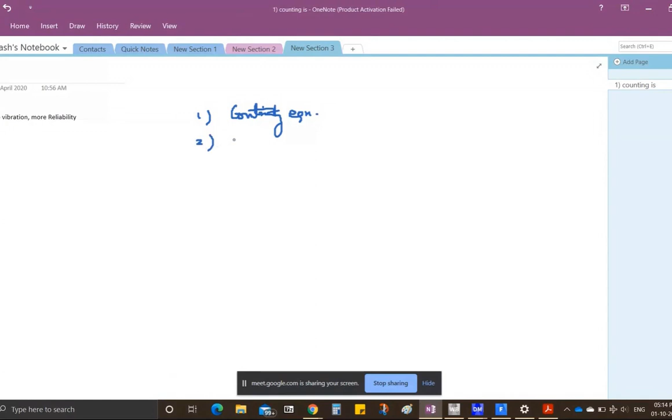First thing that we discussed was the continuity equation, in different forms. We were trying to understand the momentum equations. So momentum equations, if they include viscosity as an aspect, it is called the Navier-Stokes equations.

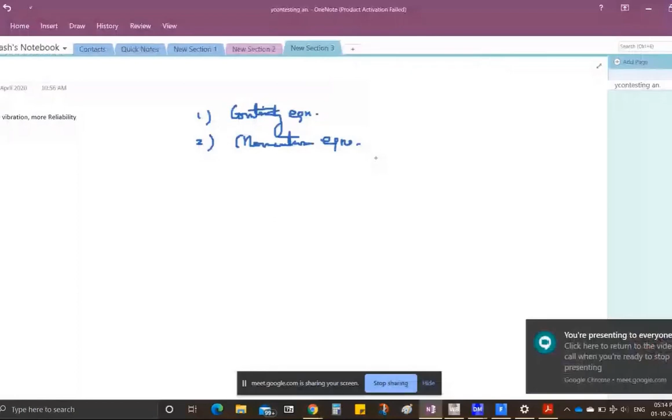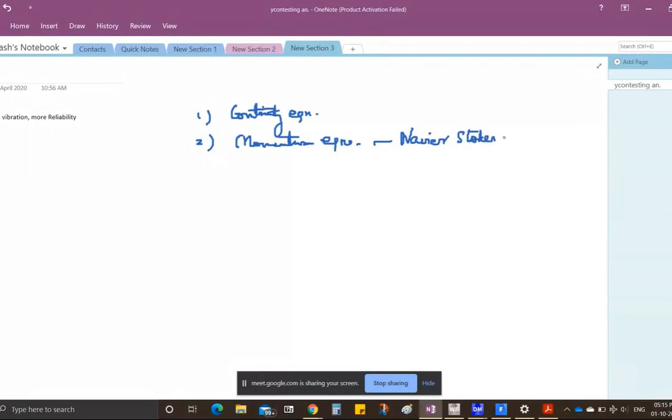So momentum equations, this is what we are trying to understand: the conservation of momentum. This is called the Navier-Stokes equation. So if it is involving viscosity as a parameter, if viscosity is included as a parameter, this is called the Navier-Stokes equation.

In some cases, you may think viscosity is not an important parameter, so we can drop the viscosity term from the equation. In such cases, the momentum equation is called the Euler equation, since viscosity is negligible. So these are the two ways in which momentum can be written.

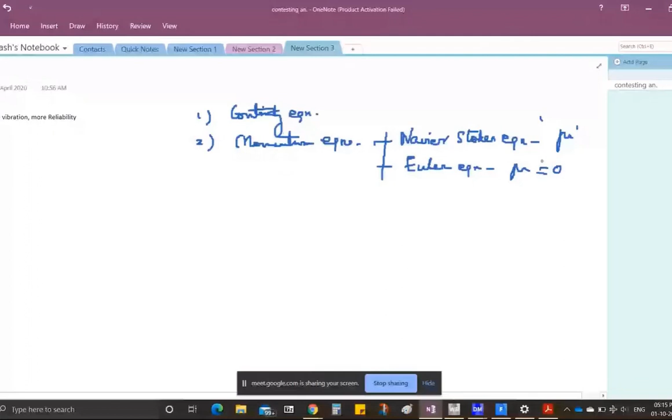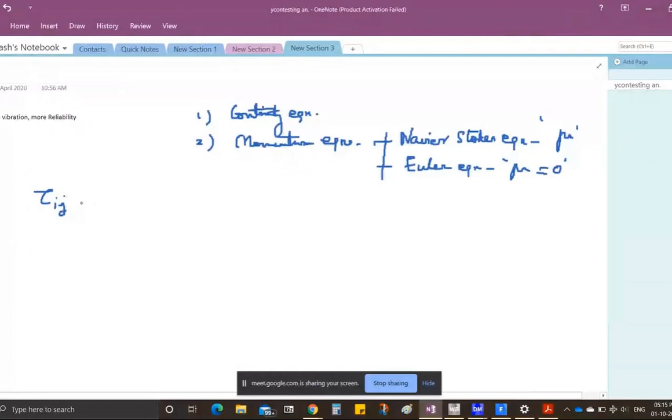I was trying to give you the notation in which you can represent stress, and from stress you could calculate the forces acting, based on the equation stress into area, on which it was acting. We were trying to understand this in the perspective of a fluid element which was in motion.

This fluid element is subjected to motion because of the force, which can act in different coordinate axes.

I told you that, for example, we can take the control mass approach if you want. Control mass and control volume approach both can be taken for finding the governing equations. So we are trying to understand this in the perspective of the control mass approach.

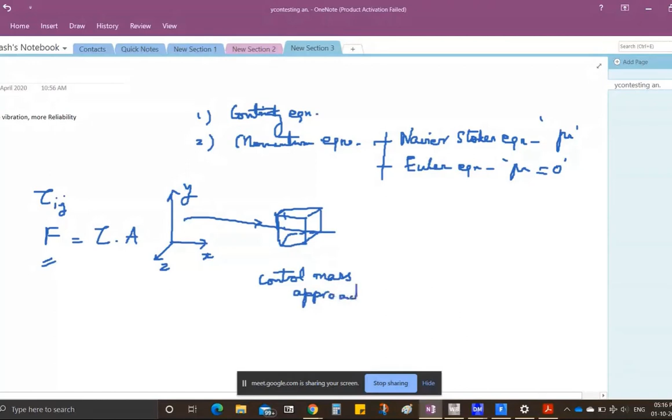Here we could understand these forces can be of different types. This is mainly about surface forces we are talking about. The surface forces can be shear force or normal force. Then another category of forces is the body force, of type gravity, and another type is field forces like magnetic field force. Such forces can happen.

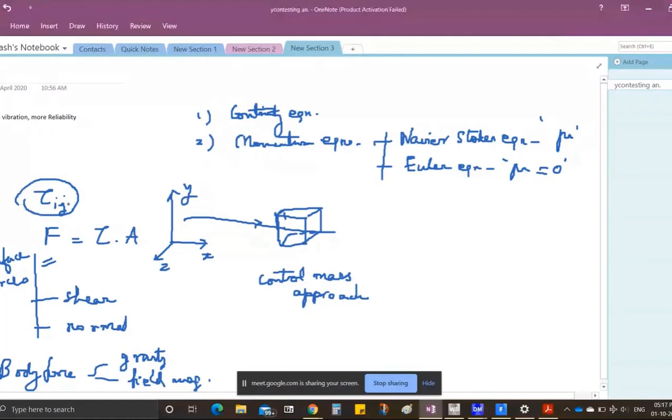In this notation where we represent the shear stress, I was telling you it represents initially that the stress is acting in the direction J, and this stress is acting in a plane that is perpendicular to I. This is how the notation is written. So with that we understood we could represent the stresses.

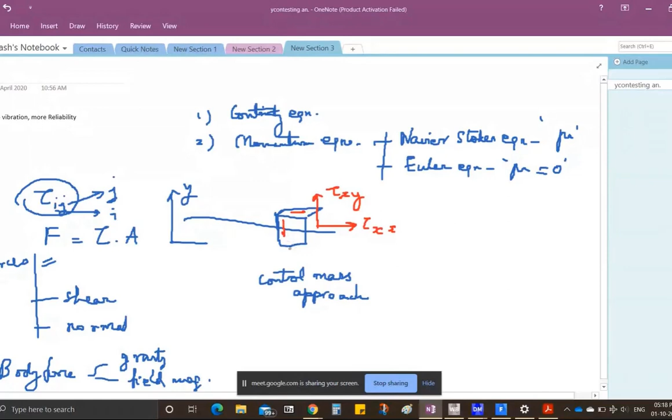We could represent the stresses like normal stress with this notation. Similarly, we could represent shear stress with this notation. Similarly, you can imagine the stresses in all the different faces in which it could act. I was giving just a simple example for it.

So now with this stress being calculated, and knowing the area on which it is acting, because this area is available to you, you could easily find the forces on each of the faces that is acting. Let me draw one single figure which will represent all of this before writing the final equation. I will not derive the equation because it will take some time. You can refer to any textbook to get it, but I'll give you a hint on how this has been framed so that when you look at standard textbooks, you will not be confused how this was obtained.

I want to go to this final equation because it gives a lot of insight on what we learn later. Otherwise we will never know why the equation is written in that way. In order to explain that, I would need a detail of a fluid element, which is under various forces on its axes, on its faces.

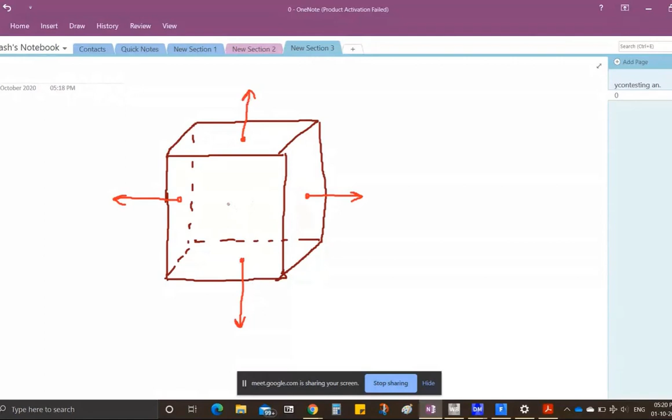Let me just write the various forces here: normal force here, similarly the normal force here, the normal force on the other face, similarly the normal face force in this direction on the other face. Similarly, the shear stresses I could draw with another color. So this is the starting point, I would represent that with some arrow mark.

Okay, so similarly you can imagine this face also having such forces. So I just wanted to write how the expansion will look like.

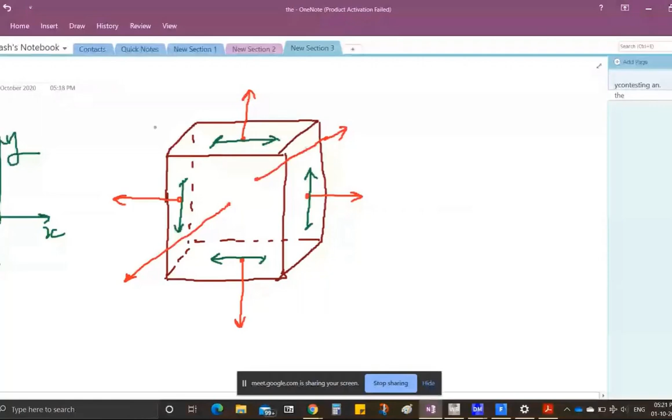I'm concerned about the different axes now, because I need the forces in the various axes. Let me think about only one particular force component, the force in the x direction. All the equations will follow suit, similar to it. So this is why I want to write only in one direction. You can see that all three axes are important, but I will write only one direction.

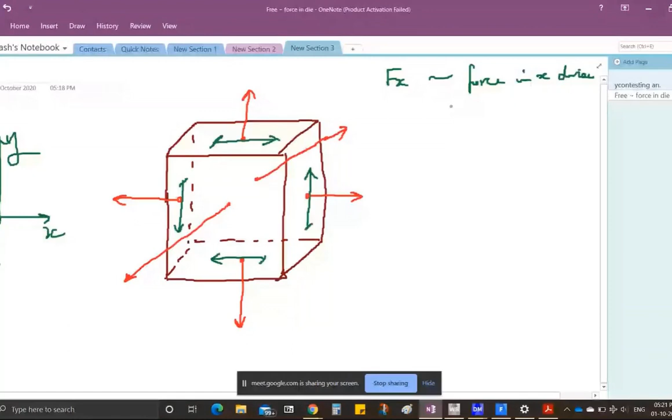So if you write this is equal to mass into acceleration, the mass of the element is known. Acceleration has to be found out with the change in velocity, and this is equivalent to the force acting. It is a summation of all the net forces in the x direction that you have to find. So the notation will go accordingly.

So let me say that this fluid element is surrounded by other fluid elements, so it is under pressure from the surrounding fluid elements. So that also has to be drawn. Let me draw that also.

This is subjected to pressure from the surrounding fluid element. Similarly, you can imagine pressure acting on all faces from the surrounding fluid elements. So let me name this as P, and the area would be, I can see here, this is dy, and this is dz, and this is dx. So it is very easy to find the area now.

We can denote like this. This pressure acting from the surrounding fluid is acting on this face, so it would be dy into dz. This would be the area.

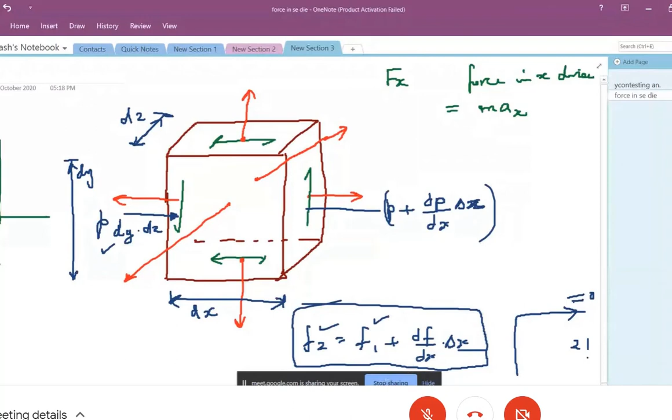So here F1 being the force on one side, F2 is the force that you're evaluating on the opposite side, which is separated by distance dx. I can follow the same notation as in the Taylor series expansion. Instead of F1, I can put P. Instead of the function variation with respect to space, I can put dou P by dou x. Instead of delta x, I can put delta x here. So this is how you got the pressure on the opposite face as P plus dou P by dou x into delta x. This sort of mathematical expansion is used in most of physics, whether it is solid mechanics or fluid mechanics. You see this sort of expansion when there is continuity in a function. This is a technique that we use in engineering physics.

Now this gives you pressure, and now you have to multiply with the area, which is again dy into dz, which will give you the pressure force on one side. So it is acting normally from all the surrounding elements onto the fluid element, compressing it.

Similarly, if you imagine this part, I don't have enough space, so I'll just take it out and write. This is tau, let me write this one. The green colored one is actually tau yx with our notation, so this is the stress. This is acting on the elemental area dx dz. So this would be separated by dy distance.

So I can just go on the Taylor series expansion again, plus dou tau by dou y into delta y. So this would give the incremental stress on the opposite face, acting on the same area dx dz.

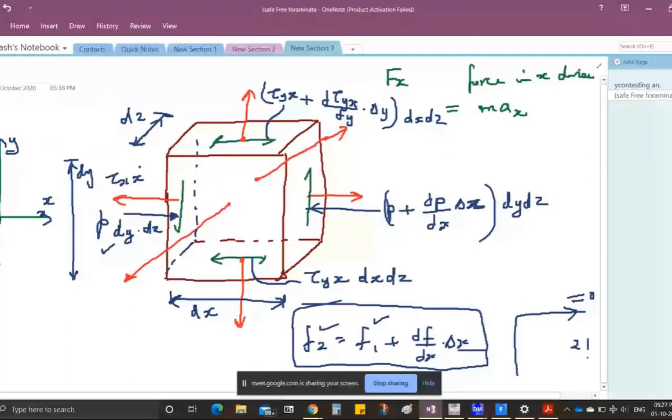So on the other side, it would again be based on Taylor series expansion, plus delta x, and then the area dy dz.

So I am just writing only for fx. I am writing only the stresses which will contribute to fx. I am not considering all the others presently, because if you want to write the force equations in the other directions, you have to do that on your own. Now I am writing only for one component of force.

So you see here, these are the forces which will cause the motion in the x direction alone. This will contribute to fx alone. So if you write this equation as the net...

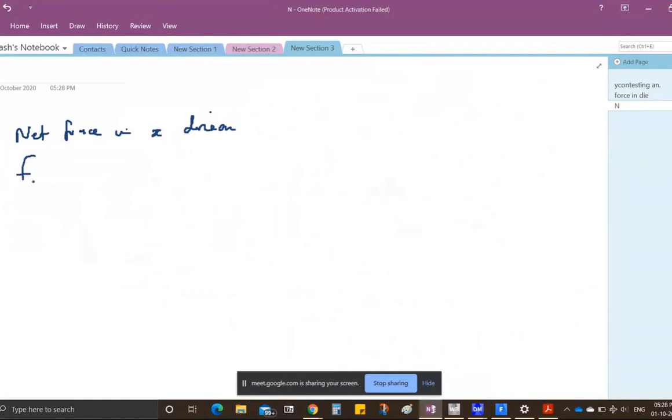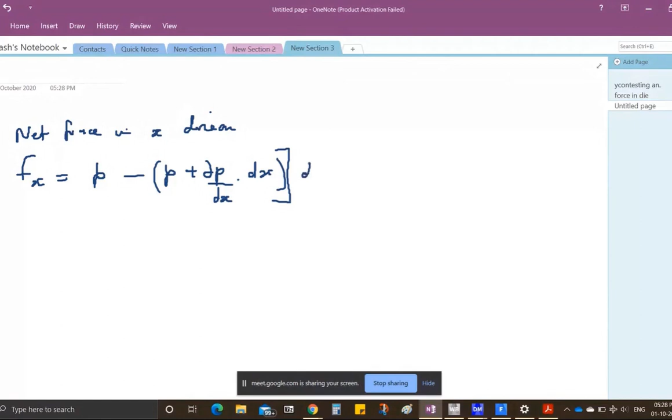With this I write the net force acting in the x direction. So I get f of x, f suffix x, is equal to p minus p plus dou p by dou x. Don't get worried, because this is important to know some aspect of the Navier-Stokes equation that you will develop later, and also the convection diffusion equation that you will use for your numerical schemes. This is why I am discussing it. Don't worry, you need not memorize this, just understand how it came, how it came to this form.

Then plus tau xx plus dou tau xx divided by dou x into dx, minus tau xx, and again it goes on like this. I'll write the other terms too, so that we can complete one and discuss based on that.

Now, tau yx plus dou tau yx divided by dou y into dy, minus tau yx, again acting on that area, dx dz. And then additionally the last term, tau zx plus dou tau zx divided by dou z into dz, minus tau zx, which is acting on the area dx dy.

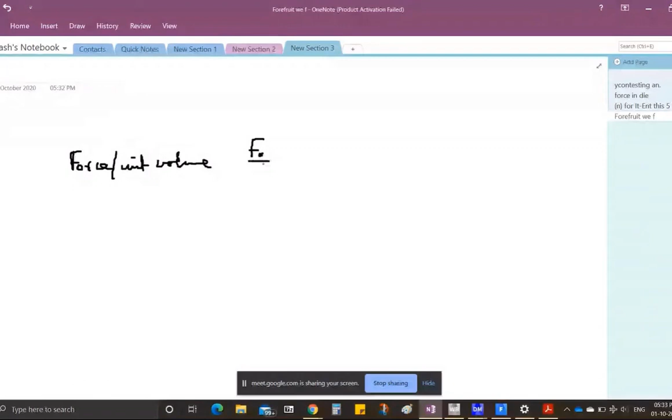So here at the end we get force per unit volume. Force per unit volume. So Fx per unit volume is equal to...

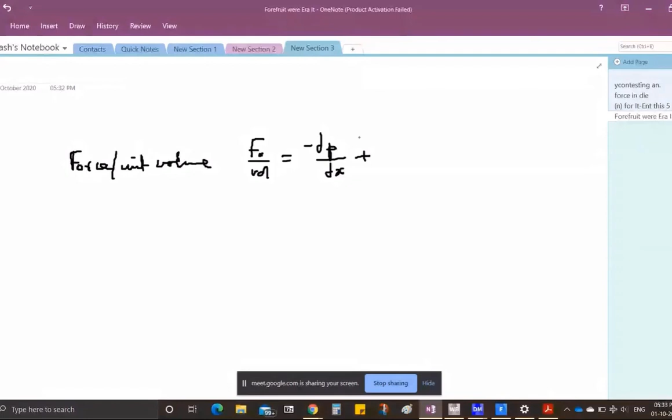Dou p by dou x minus dou p by dou x plus dou tau xx by dou x plus dou tau yx divided by dou y plus dou tau zx divided by dou z. Okay, so let me think, additionally to this.

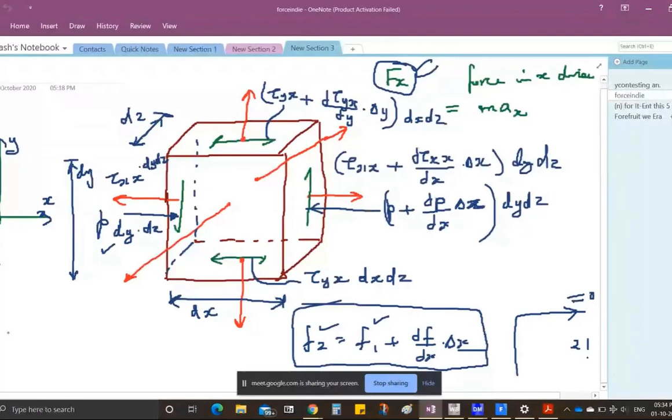Additionally to this, let's say there is some magnetic field force or some body force of some nature which is pushing in this direction. By definition, a body force has to act throughout the entire body, the entire volume, without any preference, just as gravitational force acts throughout your entire body without preference, whether it's your head, leg, or hand. It acts through the entire volume.

So here, if the element is to move in this direction, I say the body force is influencing it, let's say it is in a magnetic field or under a gravitational field, whatever it is. Some field force is acting in the x direction. So let me write this as body force, to avoid confusion.

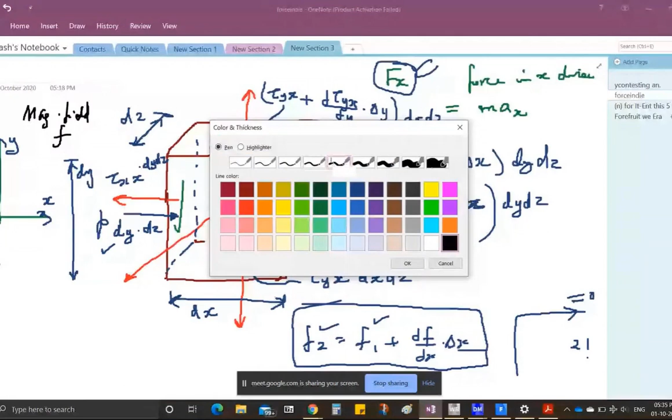Don't be surprised with the notations. I'm writing them because they're usually followed in most of the literature and textbooks. So the body force in this x direction is acting. You can imagine the body force to be something like a magnetic field or gravitational field, which is prompting it to move in the x direction, additionally to all these stresses which are helping it move.

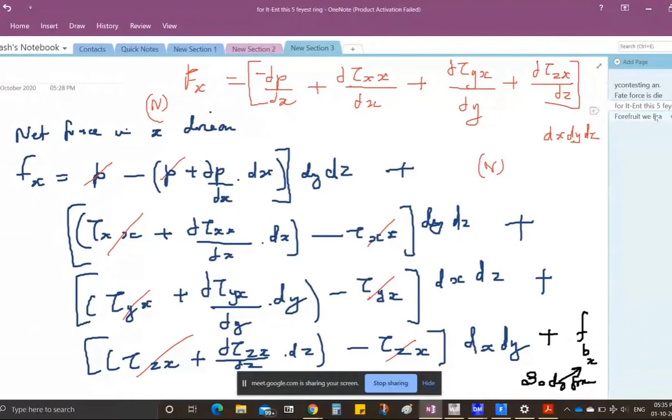So in that case, I can add to this fx the body force also, which is trying to help move it in the x direction. I just wanted to include this here, the body force, which is causing the motion in the x direction.

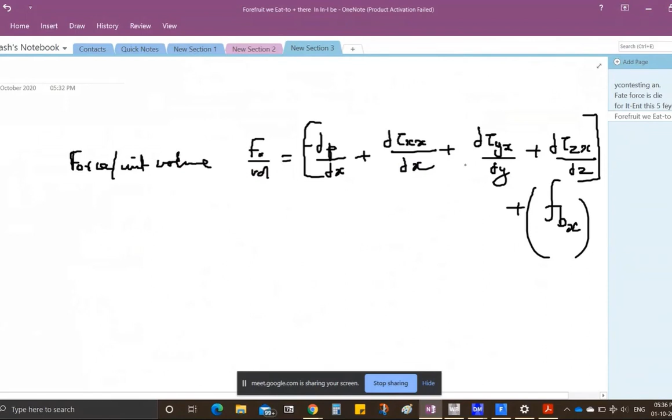So the shear stress and normal stress components forces, additionally to body force, this is the contribution coming from surface force, and this part is the body force contribution.

The only thing is, to make the units balance to Newton per meter cube, we should consider the small letter f suffix bx to be Newton per meter cube, the body force per unit volume of the fluid element. So when you substitute the value, you have to first find the value of the force and divide it by the volume to make the units correct. Don't directly put the source term as Newton; it has to be substituted as Newton per meter cube.

I'll just write it for your convenience, for you to remember, that it has to be substituted as Newton per meter cube. Now, this is a very famous relation. You see here what is given on the left hand side, this is force per unit volume.

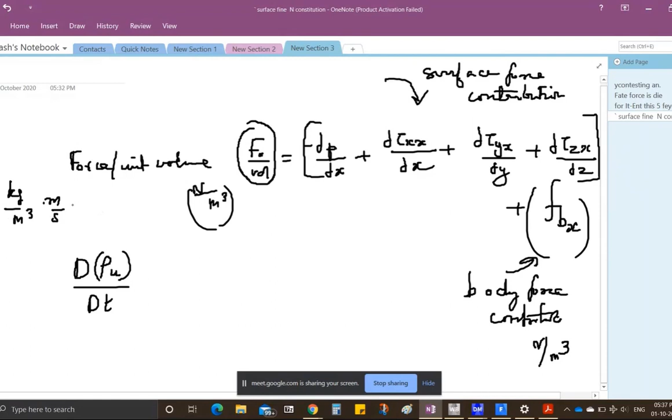Force is nothing but change in momentum, and the total change in momentum is actually the d by dt of it. So here it is kilogram per meter cube into meter per second, per second, divided by time, per second. So this is kilogram meter per second square, which is Newton, and on the bottom you have per meter cube. So this is basically the same unit we're discussing, Newton per meter cube.

This is change in momentum, total change in momentum. I told you the total derivative comes as part of the control mass approach, and this is tracking the total change of momentum of the fluid element, as per the control mass approach.

So this is rho u by dou t. How did rho u become Newton per meter cube? I discussed this by balancing the units. You can see that m into v, or m into u, is momentum. Change of momentum divided by time gives you force, and the density term ensures that underneath there is a volume component. So it becomes kilogram meter per second square divided by meter cube, that is Newton per meter cube. So the one you are tracking on the left hand side is nothing but dou rho u by dou t, and on the right hand side you have this.

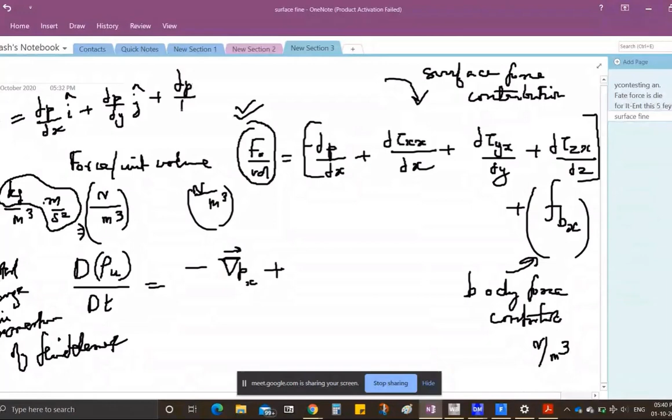So here you see the left hand side is this. On the right hand side, instead of the partial derivative dou P by dou X, I have just written gradient of pressure, taking only the X component. Gradient of pressure has all the components: dou P by dou X, which is now a vector, plus dou P by dou Y in the J direction, plus the pressure variation in the Z direction. So I have written only the X component, which is a scalar part of the gradient of pressure.

Similarly, if you want to write the other momentum Fy, you will include the gradient of pressure, the Y component of it. This part would be the gradient of pressure, the scalar Z component of it. So just understand that I have taken only the X component of it, which is a scalar. So this is a scalar equation, I can take the scalar part, which is only in the X direction. I included it.

Oh, I missed some. Okay. Similarly, okay, I lost some information because of this pen. So I filled them out.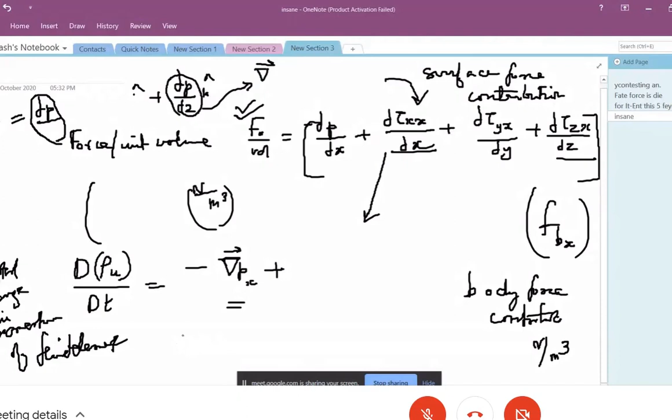Now this part I have to write. And closely observing this shear stress equation, you have an equation for shear stress based on Newtonian fluids or non-Newtonian fluids. You can relate shear stress and viscosity and gradient of velocity. So you can relate these always.

We have Newton's law of viscosity, which tells you that shear stress and rate of shear strain can be related with an equation. They are always proportional for Newtonian fluids, and can be related through an equation when you include the proportionality constant called viscosity. So viscosity is basically the term which helps connect shear stress with shear strain. In Newtonian fluids, they are related proportionately.

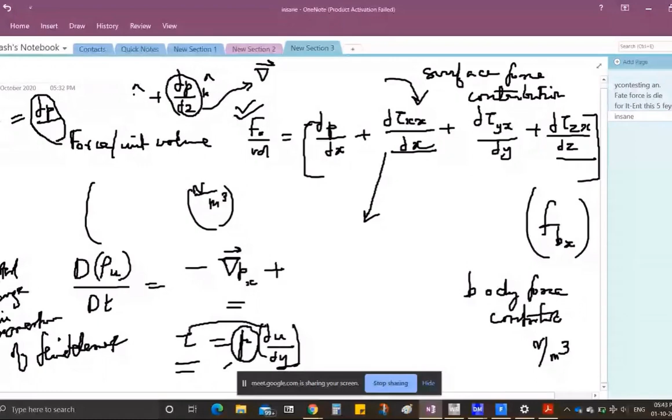In non-Newtonian fluids, we have a nonlinear relation, whether it is rheopectic, thixotropic, or other non-Newtonian fluids. We have variation of viscosity and shear stress which is non-linear. I'll not go into that. But still, there is a relation between shear stress and rate of shear strain through some exponent function or constants appearing in the gradient value. For Newtonian fluids, they are directly related through an equation using the proportionality constant called viscosity, which connects shear stress with the rate of shear strain.

You can do experiments to find if the fluid is viscous or not, Newtonian or not. Most of our fluids are Newtonian in concentration, or if not, it will be informed to you before working out a problem. If you work with specific biological fluids, like blood or human body fluids, you have to consider them non-Newtonian. You cannot directly use this relation; it goes by an exponential function. Anyways, let us consider for the time being that this is a Newtonian fluid for writing the equation.

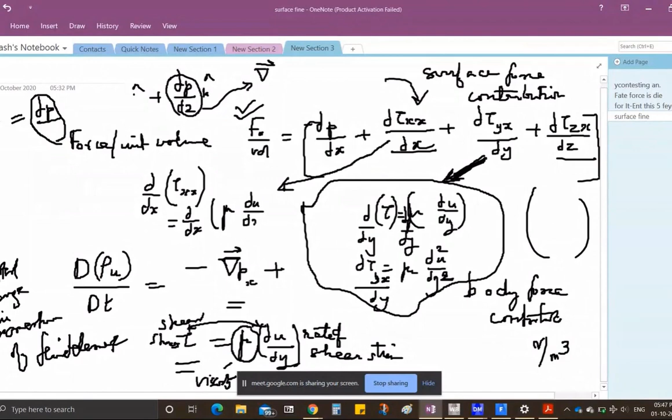So here, dou by dou x of tau xx, which is equal to dou by dou x of mu dou u by dou x. So here it is again mu dou square u by dou x square. This is the expansion for this term.

So here you see that ultimately, let me rewrite this equation on another page. It gives the change in momentum — the total change in momentum is going to be the x momentum equation. I can similarly write the y momentum and z momentum equations.

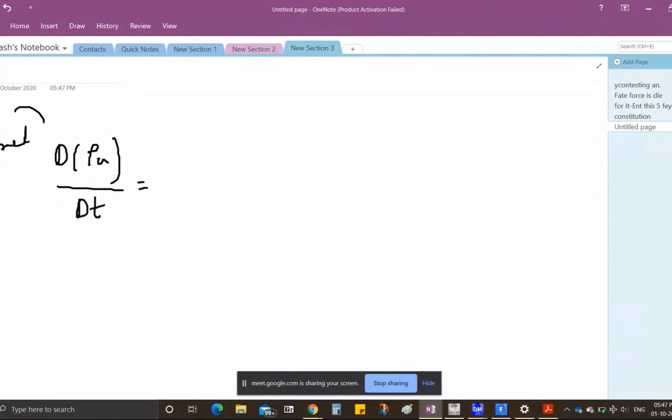This is going to be equal to the scalar component of pressure gradient in the x direction, plus mu being common, all the other terms now appear as dou square u by dou x square plus dou square u by dou y square plus dou square u by dou z square, plus the body force component which is in the x direction. This is nothing but Laplacian of u. Mu is appearing here, so I have to write mu into Laplacian, and then you have the pressure gradient in this direction plus the body force component.

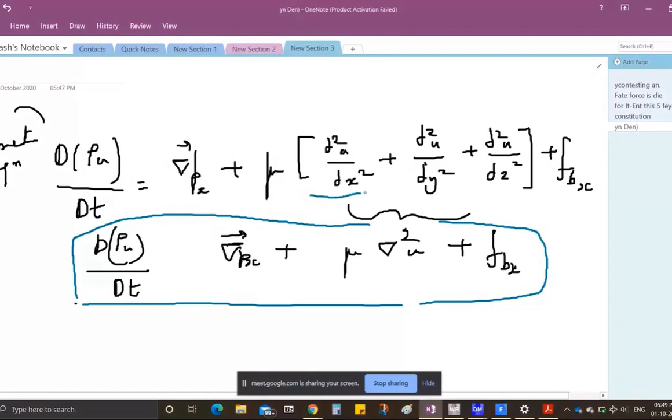I'll tell you one easy way to remember this. This is the final equation. People struggle trying to remember this equation or relate the physics of it, but I'll tell you, it's very easy to remember. This part is the Laplacian, which goes here, and this comes here. Just physically imagine it. This equation is called the x momentum equation, and it's a part of the Navier-Stokes equation.

Similarly, you can write the other components. So the y momentum equation — you can write the gradient of pressure in the y direction.

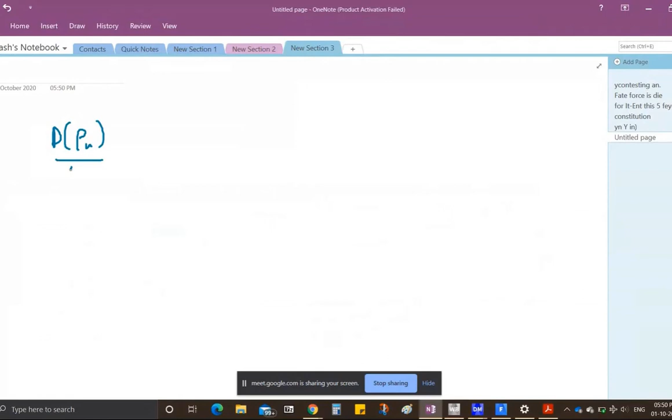The y momentum equation — just take the scalar part of it, with the body force component in the y direction. Is that the momentum equation?

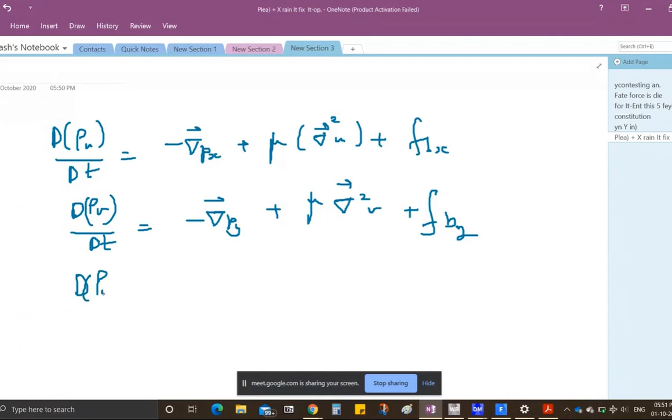Together, three equations — this is x momentum, this is y momentum, and this is z momentum equation. They are force equations, force per unit volume equations, and together these equations are called the Navier-Stokes equations in fluid mechanics or fluid dynamics. So basically, this is the concept of developing the Navier-Stokes equation.

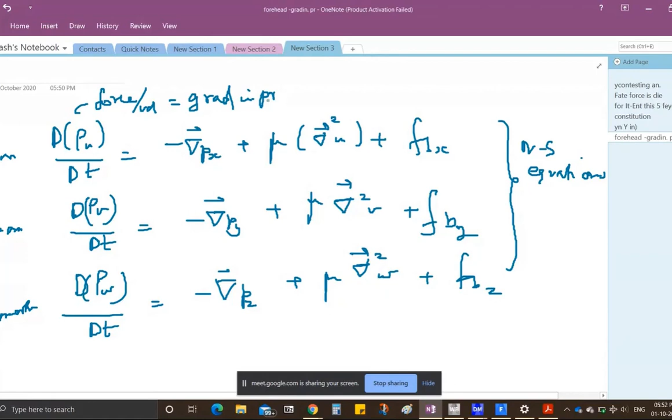If you want to remember this, there's a very easy way. It says that force — and please note, it's obviously force per unit volume — is contributed by the gradient in pressure. You should read it like that. If you read the equation, it's very easy to remember; if you try to learn it with notations, it is very difficult. You should read the equation: gradient in pressure in the same direction, whether it is x, y, or z, same plus. And you see this is Laplacian of velocity multiplied with viscosity, which came from viscous forces. This is connected with Newton's law of viscosity — it came from viscous forces. So basically, that part represents the effect of viscosity, the effect of viscous forces.

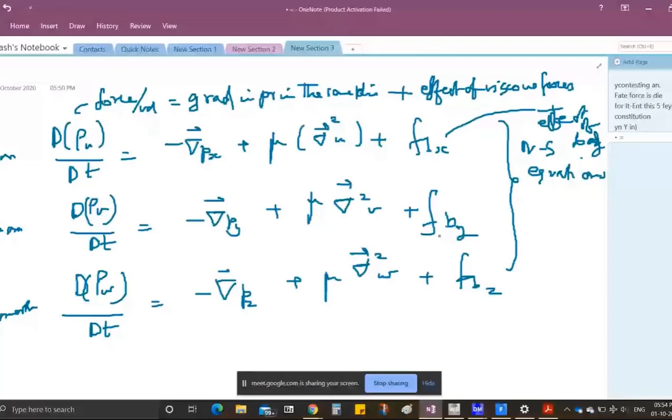Sorry, guys, the power was running low. So, did you get it, guys? Did you get what I'm trying to tell you, everyone? Yes, sir, is it okay?

Yes, sir. Okay, so please try to relate physically what happens with fluid and motion and how these equations can be simply, easily remembered. And when you see an equation which is showing Laplacian of velocity multiplied with viscosity, don't be surprised, it is just showing viscous forces. You should not be surprised or afraid looking at that equation wondering what it means. It just means that it is a viscous force.

So when you see del P or gradient P, you should not be worried. You should think that pressure gradient is acting on that body. So if there is something like a source term written, and it says F suffix B, you just understand it's a gravitational or magnetic field force. So if you start thinking like that, fluid mechanics equations start making shape in front of your eyes, and you're not surprised to see equations, and you won't be worried that you have to remember this. I hope it is clear. So this is how it will be developed.

Similarly, the last set of equations, I will not write any derivation, but I will only mention which is very important to you, because I need to move on. So I'm just going to write only the last set of equations. I will retain this, I will come back to this page. So I'll go to the last set of equations, that is the energy equation.

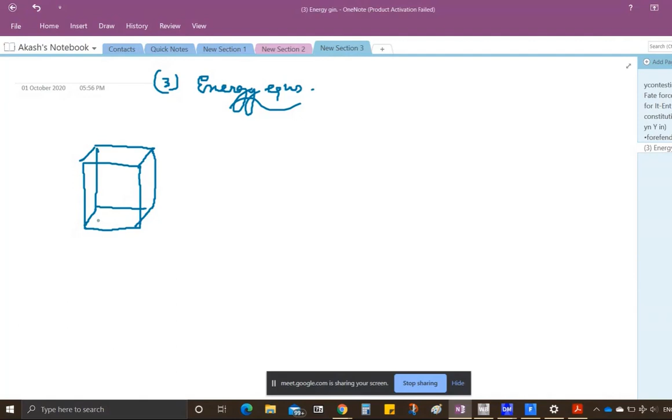Sir, I have one question regarding the Navier-Stokes equation. Sorry, can you repeat again? Sir, you have written that d rho u by dt is equal to pressure gradient term plus viscosity term and body force. Yes. I have seen in one literature an additional term, d by dx of mu plus lambda, du k by dx k. So what does this lambda signify? What is its significance? Yes, it's good that you asked. I was just trying to skip that portion because I thought you might not be interested to learn that much detail, but okay, I'll come to that.

So for Newtonian fluids, this is applicable. There was a scientist known as Stokes. You can see there is an entire flow regime under his name, the Stokes flow regime. He worked really on highly viscous fluids, so for him the viscosity term mu was very important for his studies. There is an important category of fluid physics, the Stokes flow regime, which is very important for engineering applications. If you want to study colloidal suspensions, flow of suspended particles, droplets moving through a Eulerian fluid field, Stokes flow regime is the answer for you. That scientist was working in the 19th century. Isaac Newton was also working in the 17th century to give details on Newtonian fluids.

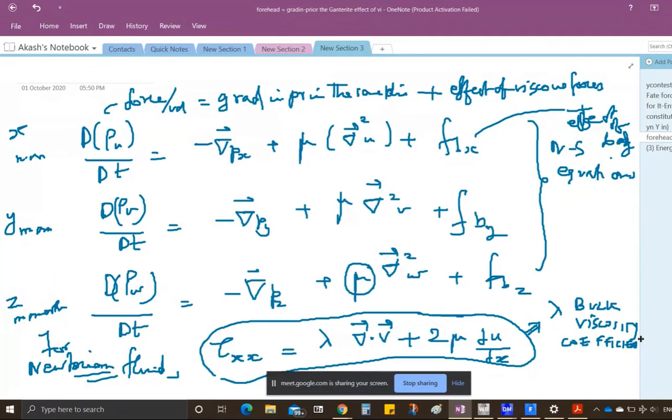You already know what is bulk compressibility coefficient, such terms, right? Here, lambda is called the bulk viscosity coefficient. And from his experiments, Stokes understood that lambda was minus 2 by 3 times the viscosity for Newtonian fluids. So there is no proof why it is minus 2 by 3 mu.

This is without proof. But till date, nobody has counter proved that it is not.

This value lambda, which he called the bulk viscosity coefficient, actually relates the Newtonian viscosity shear stress tau xx in terms of the bulk viscosity coefficient through the velocity gradient as a product, plus 2 mu dou u by dou x.

So in the earlier equation, you have dou tau xx by dou x. You could replace this tau xx with what Stokes proposed. You can take this value and substitute it here. So now this equation will completely look different, and it will appear in terms of the bulk viscosity coefficient which Stokes proposed, for which the value is minus 2 by 3 mu for a Newtonian fluid.

This is from his experiments. He came to this value through his experiments, but there is no proof for it, why it is that value. Is it okay? Yes sir, yes sir, okay.

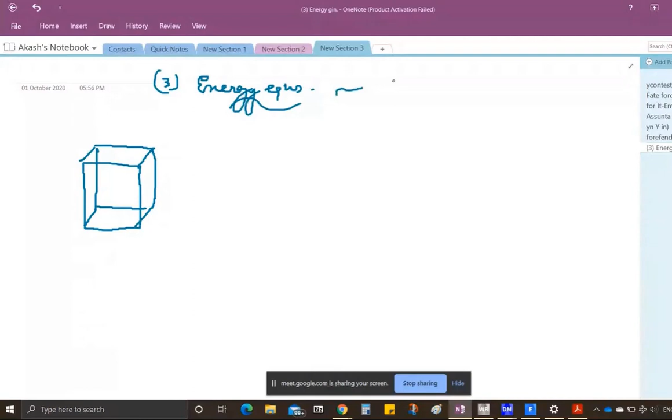So here, while discussing the energy equation, only thing I want to discuss with you is the concept of conduction, because this is very easy. Here, the energy equation is basically the energy conservation equation, just like we wrote the momentum conservation equation. We took a fluid element which is under motion, and then we applied all the possible stresses that can come, which will contribute motion in the x direction.

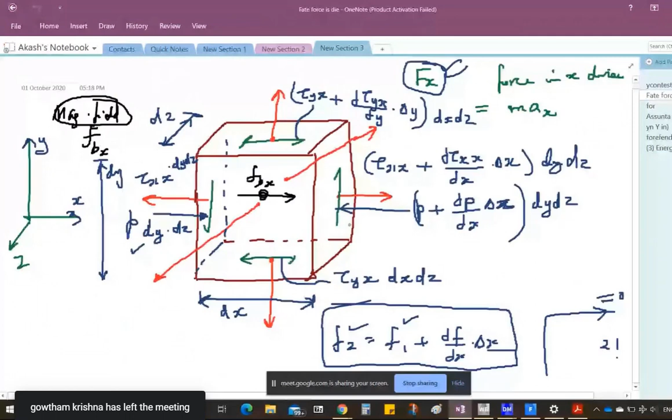Similarly, I go writing all the forces, which is all sort of energy that can penetrate this body. So basically, here you see there is a shear stress, there is a shear force. Shear force into the displacement, that would be Newton meter, this is joules. Per time t, this would be watts, joules per second. So this is in seconds, and Newton meter per second is joules per second, this is watt, a unit of energy.

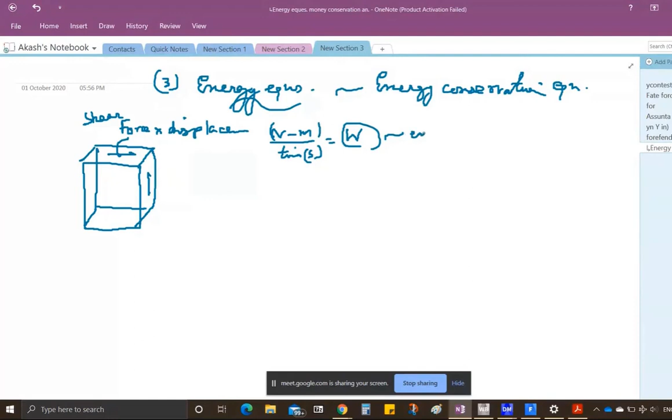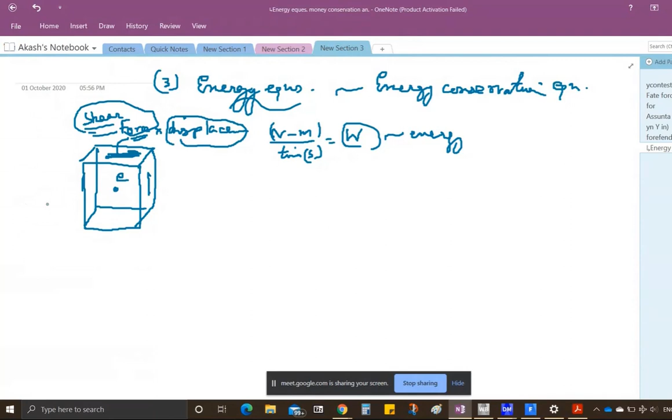You can actually calculate shear force because you already know shear stress multiplied with area gives shear force, and the displacement you can multiply with that displacement affected on this face. Similarly, you can think about having force and displacement in all the faces, that will contribute to the energy interaction on the faces of the fluid. Additionally, you have the internal energy of it, and additionally the fluid is moving, the fluid particle is moving with some velocity, so you have kinetic energy associated with it. This is internal energy.

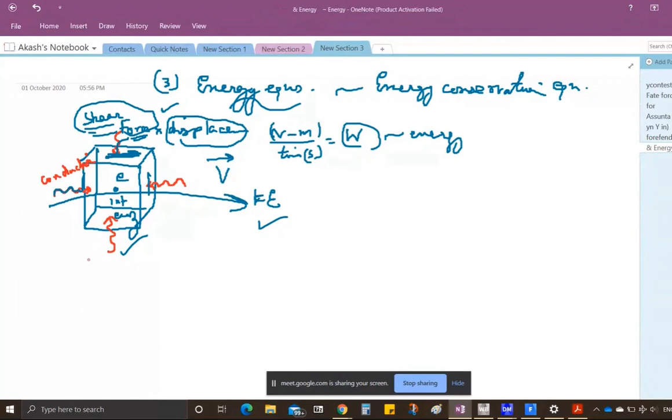Then you have kinetic energy, then energy coming from force interactions on faces. Very importantly, one which I want to mention now, which will not be detailed in many classes, but I want you to understand this because it's very important: the energy interaction from the surrounding medium to the fluid element through its faces, in the form of conduction. This component will be dependent on the conductivity of the element, the fluid particle.

When you think about conductivity, immediately the thing that comes to your mind is a solid. But please be aware, conductivity is as important in fluid as it is in solids. I'll give you one example of why it is very important.

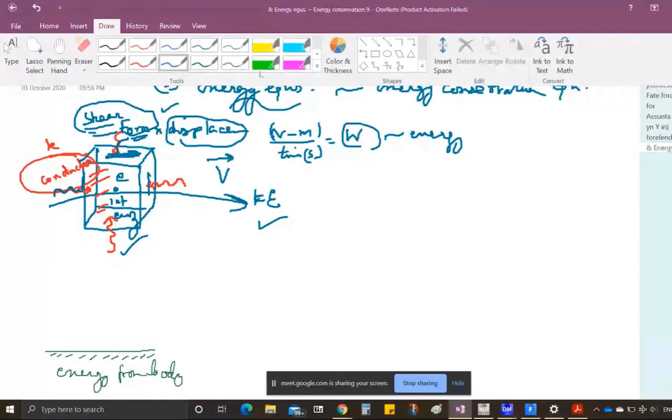Okay, anyways, so let us think about energy interaction. Energy from a body, let it be a solid body. And I have some fluid here, this is for an example. Don't think this is the only way it is interacting, I just want to give an example to make you think how important it is. This is fluid, and this is solid, and you're trying to impart energy from the solid to the fluid.

At the first layer, there is a presence of a fluid particle attached to the solid wall. I will draw that fluid particle big enough, not as big as what I'm drawing now, but think of it as a big fluid particle. The first interaction it has with the energy imparting surface is conduction, there's no doubt about that. The first has to be conduction, then only the convection phenomena happens - the bulk motion, fluid heat transfer through bulk motion, convection, happens only later. The first is conduction.

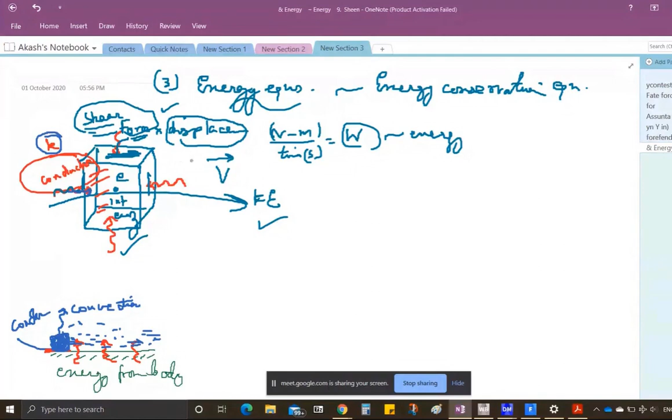So if you inspect any energy transfer at its elementary level, conduction is the phenomenon. Whether you have received energy through radiation or convection, whatever the mode of heat transfer, the energy has to come through the face by conduction. This is why in the energy equation you will see K, the conduction heat transfer coefficient, rather than anything else. For a fluid element in concern, it has to be through conduction that the energy comes in. So this is why this equation, the energy equation - I'll write it in detailed form.

So the energy equation with all these notations: internal energy E, velocity which is contributing kinetic energy, vector V, shear forces which you already know, tau xx or tau xy, into the area, into the displacement that is happening - displacement would mean dou u into t or something like that. It goes on like that. So here, with all these considerations...

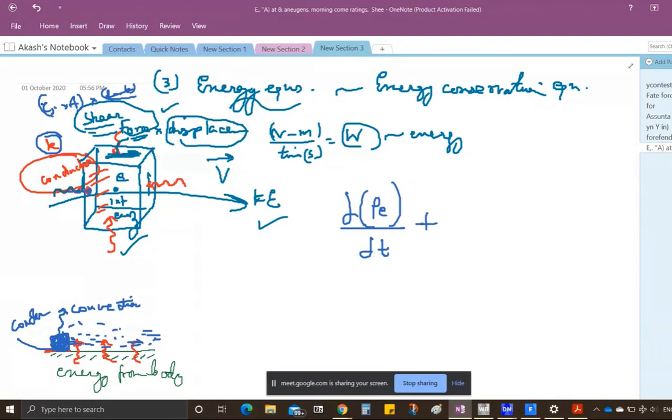Let me write and complete, I have to take it up further. With these notations which I already explained, this goes to a big equation, the energy equation, plus dou by dou x of k, the conductivity, dou t by dou x, plus dou by dou y of k dou t by dou y, plus dou by dou z of k dou t by dou z.

Now also the pressure force is trying to move it, so there is a force coming from there, then the force into displacement gives additional work or energy from that side, the pressure forces. So that appears, plus some other terms - the bulk viscosity coefficient, if you include it, will also come. I will not write all those things, I'll just add only what is relevant.

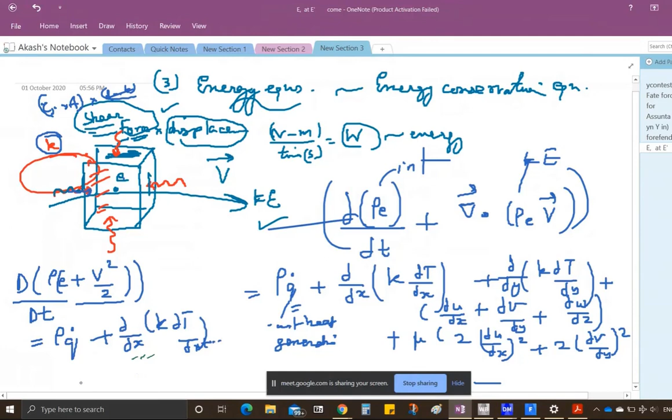Then this is actually the energy that is crossing the boundaries. The internal heat is not crossing the boundaries - this is internal heat generation. So if there is any internal heat generation, you can include that also. Plus, I'll just write dou by dou x of k dou t by dou x, and so on. Then some component becomes...

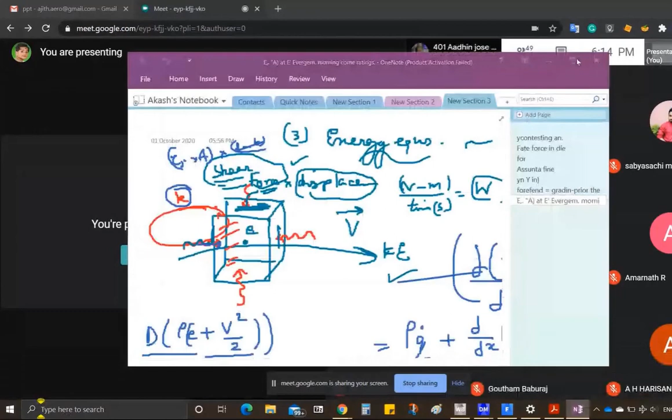My idea was to just tell you why some terms are important. So let me conclude this. Plus some terms with k dou t by dou x, for simplification, and so on.

So I was trying to relate this to what you have already written. You see here, for the momentum change, you had the total change in momentum expressed in terms of gradient in pressure and viscosity force. So you can write this part, if you want, like this.

Mathematically it is possible to write this because del square is nothing but del dot grad of the scalar. If you first find the gradient and then take the dot product, it should return a scalar, which is del square u - a scalar. So the expansion is divergence of the gradient of the scalar, and this is the way you can write it if you want that form.

Similarly, you have some parameter here, dou by dou x into k dou t by dou x. This is energy coming in through conduction - the energy that is penetrated or transferred through conduction is called diffusion heat transfer. In heat and mass transfer, you might have learned that the energy transferred by virtue of conduction is called diffusion heat transfer. So this is again a diffusive term, the diffusive transfer of heat.

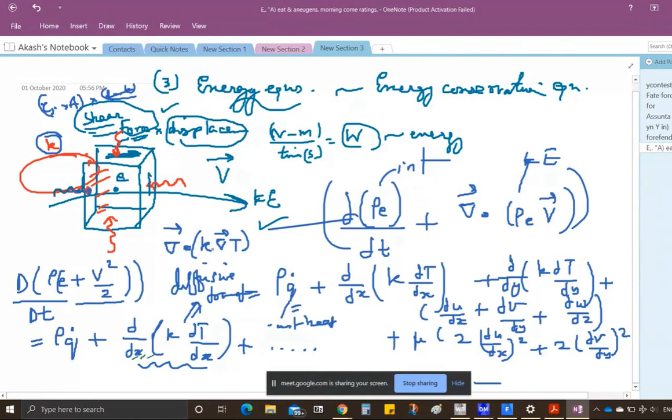Dou by dou x is guaranteed by del dot, and k dou t by dou x is guaranteed by k grad t. So see how close these equations are - here it says del dot grad u, and here it shows del dot k grad t. Both are diffusive terms - viscosity is also diffusive. I said diffusive because it appears as a Laplacian, it's an elliptical equation, so it is a diffusion equation.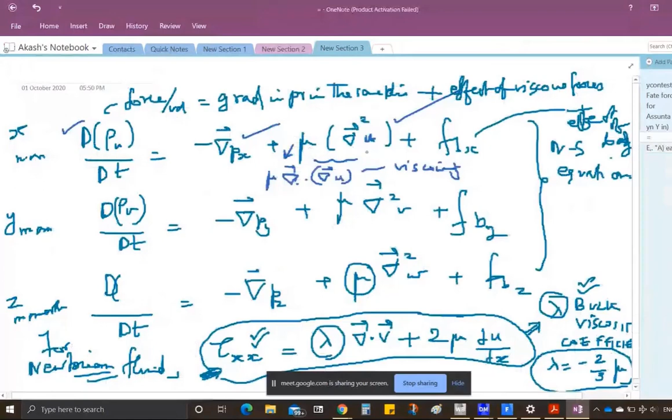So here it's again an elliptical equation with a diffusive part, representing diffusion heat transfer. What I'm trying to tell you is that this right-hand side can be clubbed together to represent something like a divergence form. It can be represented as the divergence of some quantity.

I'll continue tomorrow because I want to explain more on this. This is actually leading to the convection diffusion equation. If you understand this clearly, you will understand why the convection diffusion equation takes that form, and also why some numerical schemes have to work the way they do.

Is it okay, guys? Do you want to see the software now? Yes, sir. Okay, so I'll just present the software for 5 minutes.

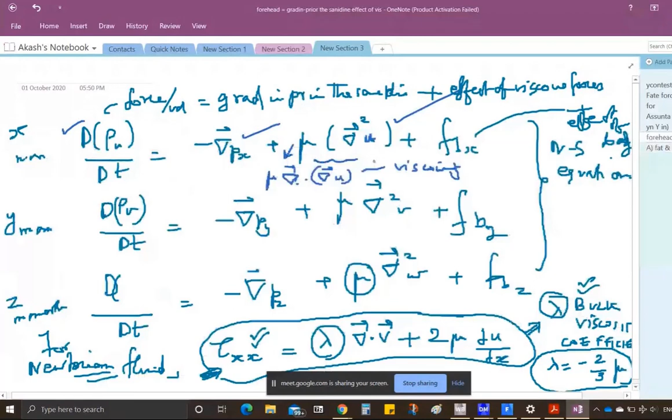Sorry, I'll just wind up within 5 minutes showing the software. So please understand, just a concluding word: all those equations, whether conservation of mass, conservation of momentum, or conservation of energy, can be written in the form of divergence of some quantity. Here, the divergence of the quantity taken is the divergence of the gradient of velocity, which is actually the viscosity part.

Similarly, here it can be represented by divergence of the energy or the conduction heat transfer, given by k delta T by delta x, which usually appears in the Fourier heat conduction equation, as we already know. So this is again written in the form of divergence of the gradient of temperature. So you see that some relation on the right-hand side represents this to be in divergence form, which is very important for you to understand.

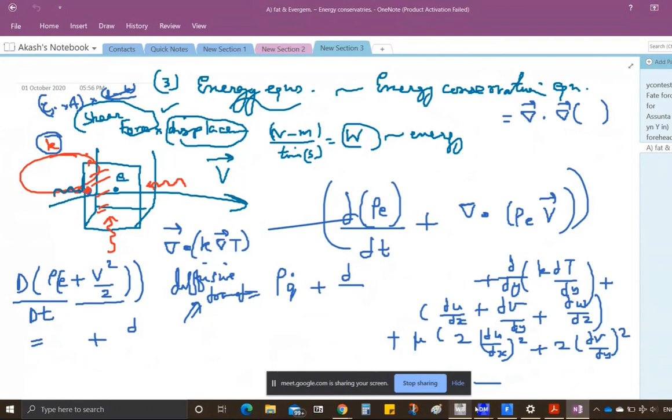So now I'll close this and show the software. I will not prefer a particular software over another because it depends on what you'll use, but I am comfortable with using Fluent. You may download Fluent from the ANSYS website. The release 2020 R2 is available from there.

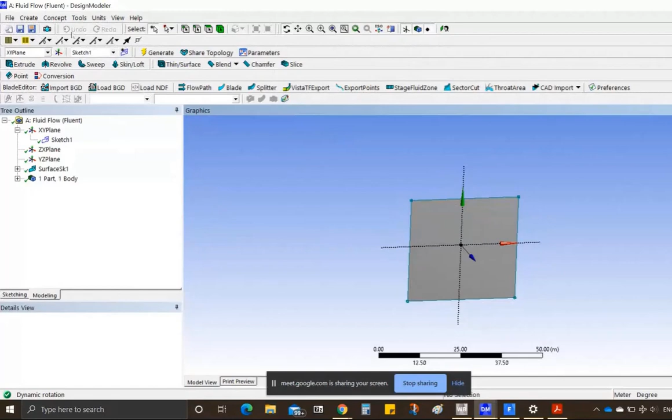In the DesignModeler, you have so many options available. Let us see what are the options available. In the file section, you can export, import, load projects, and import geometries.

On the create side, you can create plane, do some geometrical operations like extrude, revolve, sweep, blending, slicing. Then you have primitives which are already available geometries. On the concept side, you can create lines from points, lines from sketches. So all geometry related things are available here, splitting, projection.

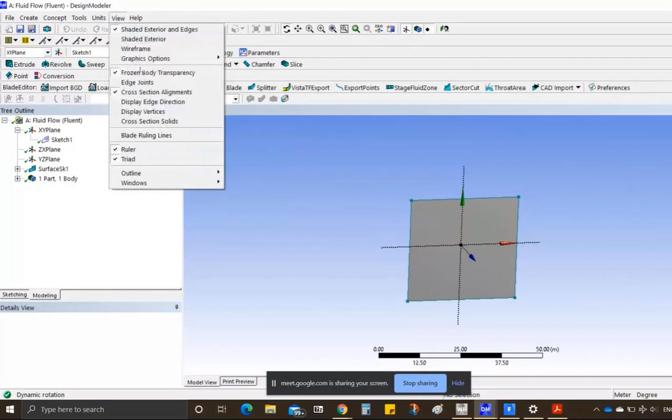In the unit section, you can switch units from meter to centimeter to millimeter, whichever is your preferred unit. In the view section, different types of views are possible. If you want to see the edges, you want to see its wireframe - different types of visualization, it's up to your comfort.

Then you have a help. Wherever you are, you just press F1, it takes you to the help for that particular screen or particular command that is active there.

Now on the top, you have so many options. You can save the file, you can capture a picture and save it as a PNG or JPG file. Here you have a select mode with two different select modes: point selector or single select, and box select. If you select box select, you can just drag and select the entire thing. If you want single select, you can pick individual components.

Here another filter is available: point, edge, face, and body select. If you want to select a point, you can select it. If you want to select the edge, you have to go and select it. If you want to select the face, you can take this, and otherwise, if it is in face mode and you want to select this edge, it is not possible.

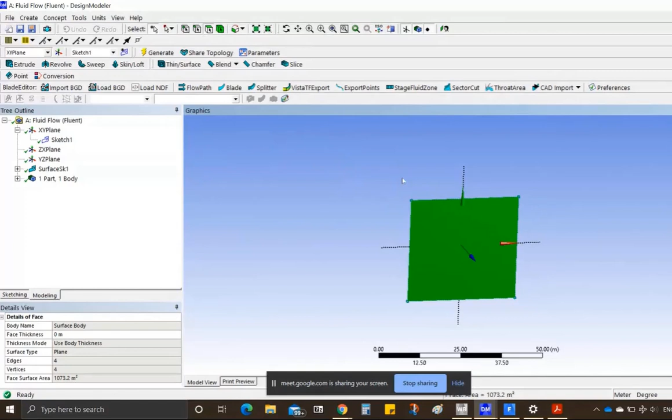It will only select face. Some people struggle selecting geometries but don't understand why it is not highlighted. The reason is that you have not selected which one to be selected, so it depends on which one is active. If it is not active, you have to make it active, then only the required thing will be selected. Even though it looks trivial, people struggle not understanding why they're not able to select this point, because it is not active.

That's it. Now, you can rotate with the left mouse button, you can pan, you can move this body here and there, and you can zoom to a point. If this is fitting to the screen, this is the magnifier window - it magnifies where you are pointing.

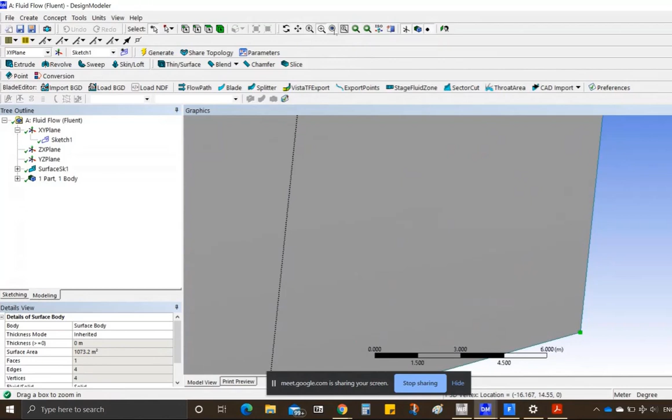I'll fit to window. Then this is a section plane. I can just section it, I can delete it. Sometimes you are interested to see what is inside after drawing, so you can take this section plane. Once you select this, it automatically comes on the lower bottom left hand side. If the section plane is deselected, you can delete it if you don't want it - right click and delete. So if there is a section plane you don't want, you can delete it so that it returns to the original.

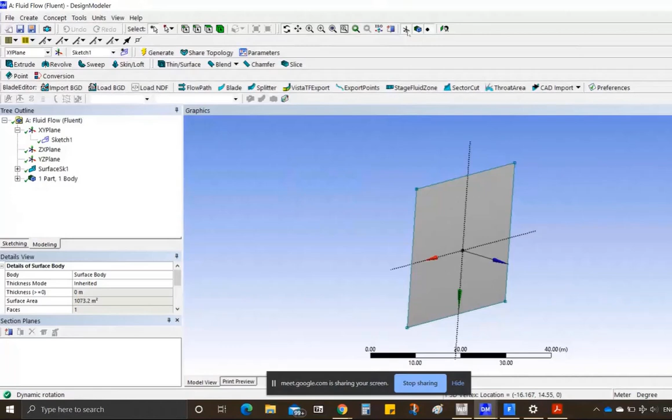Different display models - solid display, plane should be displayed or not. If you want to activate the plane, sometimes you are interested where is the normal, so you have to activate the plane tool. It will show which is the normal. Using the left mouse button, you can rotate it at your convenience. And this is like 'look at window'.

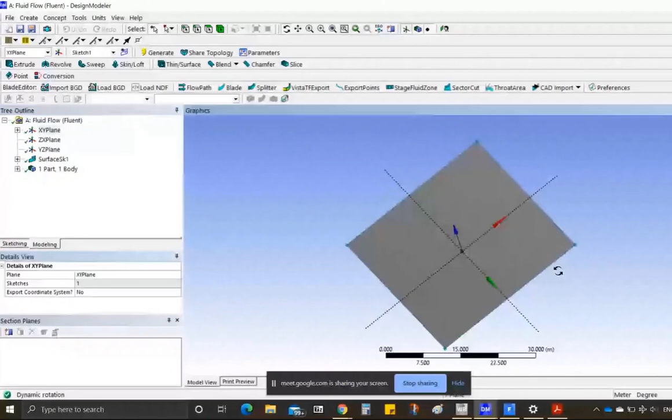So it will take you to the original active drawing plane. Here I have drawn the sketch in the XY plane, so the XY plane is the one on which I am active. If it is in this disoriented condition and I want to see which plane the sketch is lying on, you can just click it, and it will orient me directly to that.

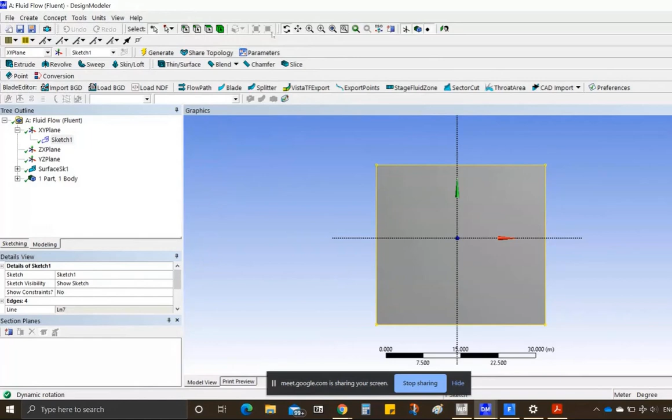So this much I have explained - the workbench, why there are so many analysis systems, and what all things can be done. I explained Fluent is of interest because it is commonly used by fluid mechanics people, though you can even work with CFX if you want. When you double click, it takes you to this window, and on right click of the geometry you can select SpaceClaim or Design Modeler - I have activated Design Modeler. In Design Modeler you can draw, and there are tools to help you draw. We discussed what is in File, what is in Create, what is in Concept - there are so many, and we'll come to all those things. We discussed the second row, single select, box select, the selection filters and why they are required - all these tools available here. Up to here we have discussed.

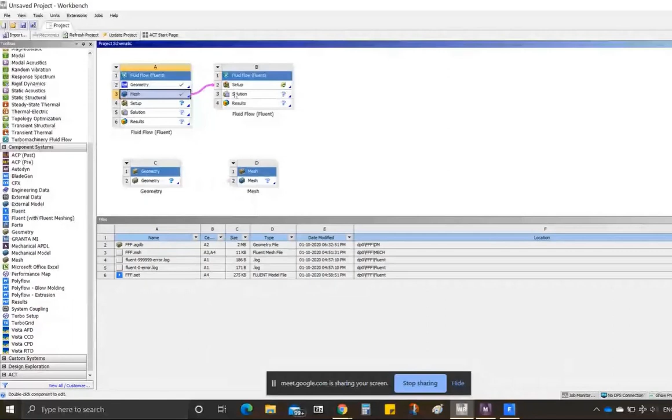So you can just start from where you want the component to be placed. Individual components can also be placed, and you can just drag and drop the connection between components so that they work together. Or otherwise, if you want a complete analysis starting from drawing, analysis, everything, then you just double click on it, and it will open up all the possibilities.

If you don't want it, you can delete it. In the right hand button, you can just go and delete if you don't want it. You can go on deleting if you don't want.

So it is just getting familiarized with the interface. If you want, please download the software from the ANSYS site and practice it. Just click different buttons and see what they offer. Just get familiarized, it is not a big deal.

Is it okay? Is it okay for today? Okay sir, okay, I'll just wind up telling the essence of what we have discussed.

We discussed the governing laws other than mass conservation. We also discussed how governing laws can be written in the diffusion, the divergence form of equation, how they represent the divergence form equation, and we'll come to see why the divergence form of equation is important to us. We also discussed how the software interface looks like, and some of the buttons we discussed. Okay, thank you.